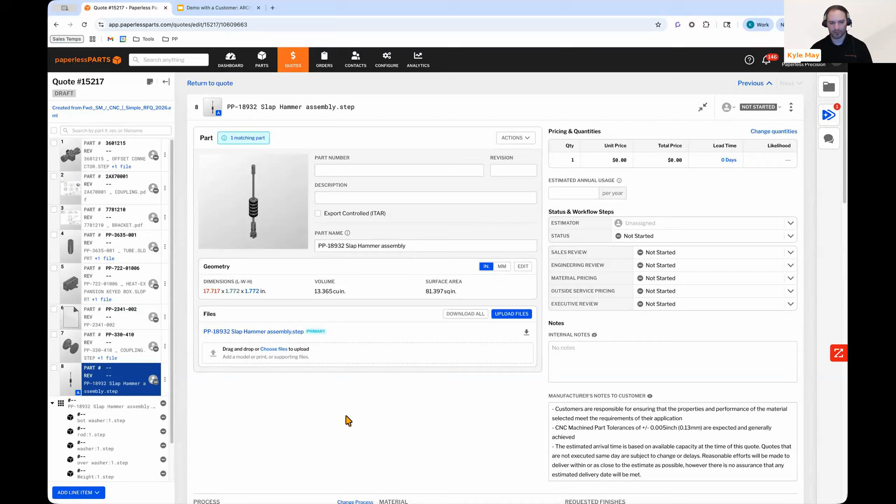You saw me just drag and drop it from our supporting files into creating a line item. Once you scroll down, you'll see that we're actually automatically breaking out the BOM for you. We'll use the structure of the model or the BOM table that lives on a PDF to automatically create that BOM.

I know whenever I was quoting, this saved me a ton of time. This is one of my primary reasons for going with a tool like Paperless. Casey, you guys seeing similar things on your side of the fence?

Oh yes, absolutely. A lot of our instruments that we manufacture are complex, so they probably have 20 to 30 components within that one assembly. So it definitely saves a tremendous amount of time having Paperless Parts versus doing it in our ERP system. Doing it in your ERP system, you're looking at 10, 20, 30 minutes depending on how many components are there. So this definitely is a huge cost savings that we utilize throughout Paperless.

I know it sounds silly saying it out loud, but one of the things I really liked it for was the node quantities, because on some of the more complex instruments, you may be looking at a single component that costs 4 or 500 dollars. Well, if you don't cost out a node quantity of 1 versus 2, you immediately lose 500 dollars on that job. So people are usually really diligent in building that out, so it takes that extra time to make sure their quantities are right.

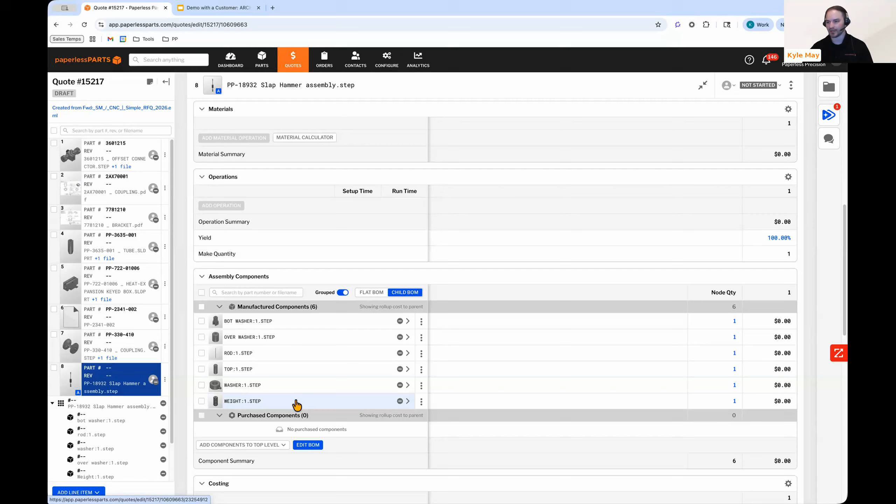One of the part files that I threw at Paperless Parts first off, whenever we were going through our evaluation, was a retractor that had 130 unique components, and I'd spent about a day and a half building out that BOM, and Paperless Parts built it out in about 30, 45 seconds.

We will go into line item 1 here and actually start costing out this part. So a couple of the things that you'll see, once again, we have this purple — we're using AI to scrape the revision and the description off the print. The other thing that we're doing once we get into a specific line item is that we're looking for matching parts.

One of the first thought processes that an estimator typically goes through is they look at it and say, okay, well what have I built that's similar to this in the past? So I can open up this matching parts feature here. We can see we're surfacing exact file matches, but we're going a little bit deeper than that. We're also looking at the geometry across all of the other line items that you've quoted in the past.

There's a lot of gen upping in medical, so whenever you do have that gen up and the geometry is still the exact same thing, but it's got a purple handle on it versus a green handle and it's a drastically different part number, you can very easily go in here and copy and paste that routing and all of those times for the last gen part.

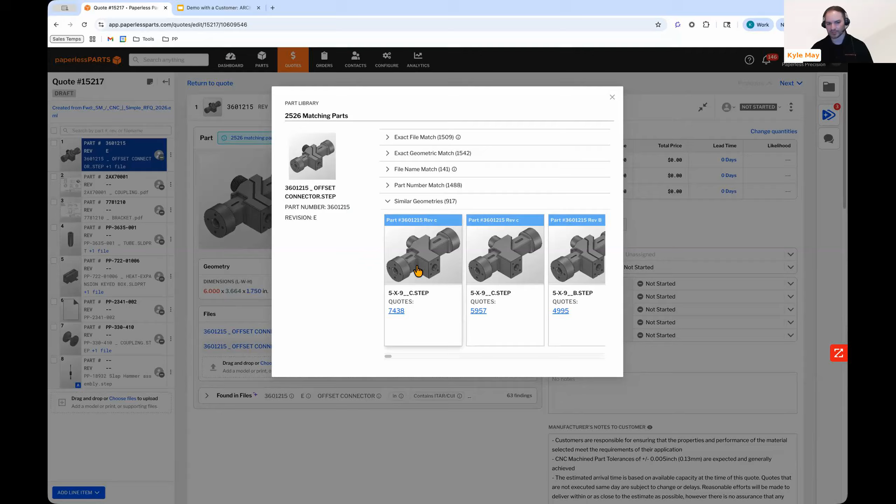And then we're also surfacing similar geometry. So, hey, this part is very close to a predicate part that I quoted a couple months ago. Instead of you having to remember that in your head, having a senior estimator remember that, we're surfacing that to you here, and you can very easily look at the visual differences and say, hey, the one I'm quoting now has a channel built in, this one does not, so I'm going to copy and paste my process and add an additional 5 minutes onto it. So there's a lot of experienced estimators doing this already in their head.

But that's kind of the problem — it's in their head, it's not in a system somewhere. So this is how we systemize that tribal information.

Scrolling down, what we're going to do now is actually put a process to this part, and a process is like a routing template that has some smart features built into it. For my shop, this is pretty generic — this is a milled part.

You can get it as specific as, hey, this is a counter torque versus a reamer versus a drill versus an inserter versus a dilator. You get very, very specific with the types of routing templates that you have built. That way you're closer to the truth from the start.

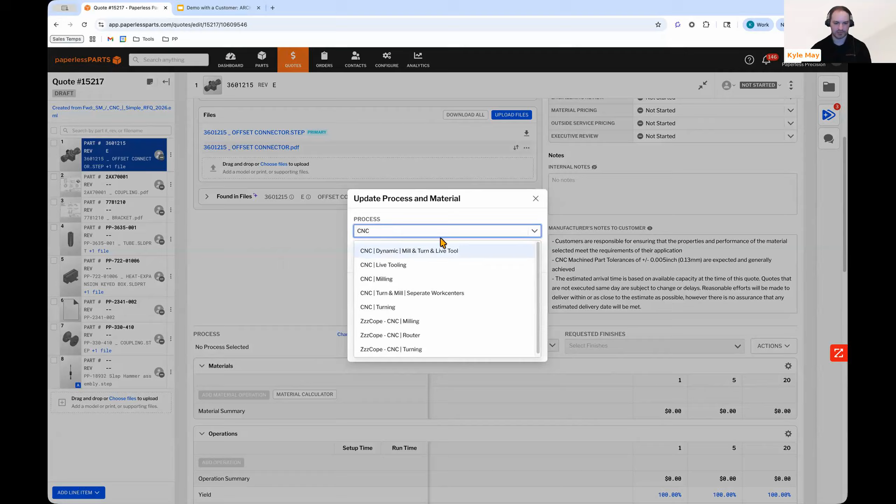So I'm just going to go in — this is going to be CNC milling for me. We are looking at the PDF and surfacing the material, so it's going to suggest it to us here, and then I'm going to update. What this does is it kickstarts our geometric interrogation engine that works in the background.

So I'll open this up now.

So within here, you do have a free CAD viewer in the system. You've got some basic tools.

So if you've got an estimator that maybe has a seat of Fusion 360 just for being able to analyze models, we see shops typically be able to save that little bit of money, or even maybe they have to be able to view CATIA files or MBD files. We can view those within here as well.

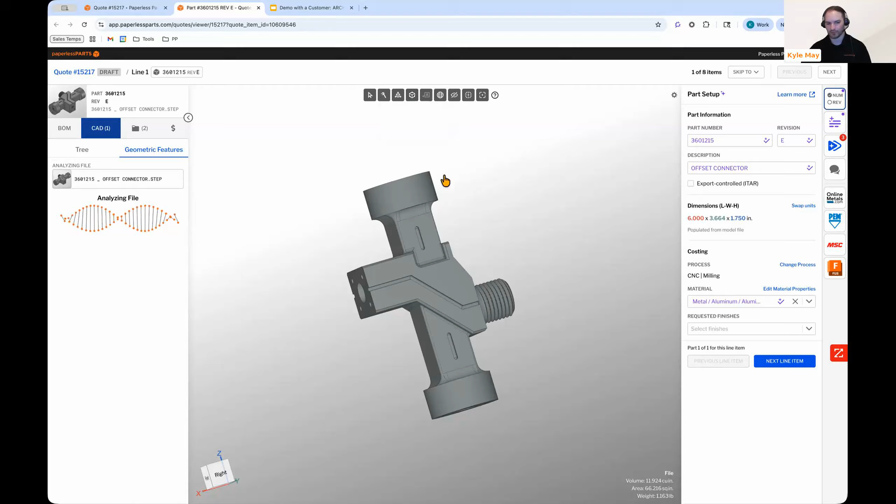But you get some bounding box, measurement tools in here to measure against faces if a dimension doesn't live on a print. We have this selection tool as well.

And so it really encourages the communication between team members. You can very easily go in here and select a face that maybe you have a question about. So I've got that face selected. I can come in here and add that in, and I'm going to tag in my more experienced estimator, Chris, and say, hey, can we do this face?

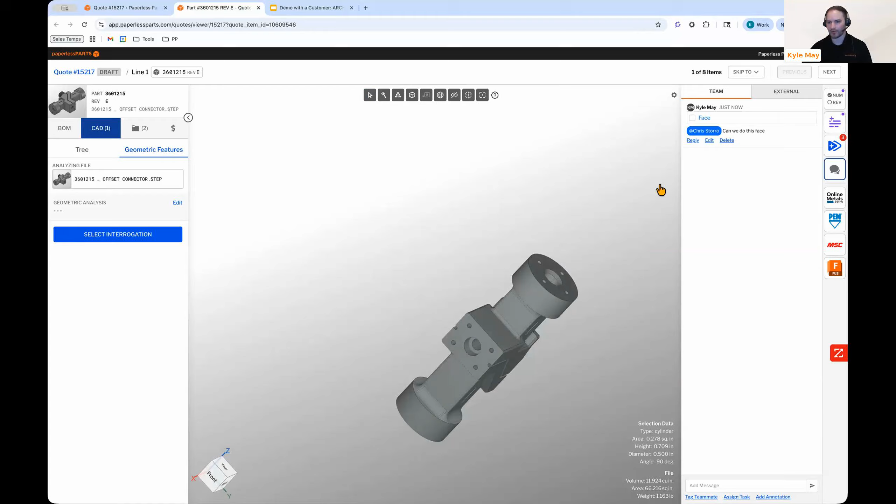So you can send that out, and once you get that sent out, they'll get a notification that, hey, you're wanting to collaborate over a part. And whenever they open that up, it'll rotate it around to the exact zoom and view that you had whenever you made it.

Curious, Casey, I know you guys have an off-site estimator. Are y'all getting a lot of benefit out of this IM service here? Yes, he uses it pretty much every day, especially for some complex geometries that we may see.

So he'll basically tag in any other person that's on site to get with the programmers and discuss different opportunities if it does not work out, as far as if it's not machinable, if it's only plungible, and if we need to make a note for any DFM to the customer regarding unmachinable features.

What about, I think I'd heard, you guys may be using some of the external chat features as well. Yes. So, like any of the DFM features that we may request from our customers if we do win the product, that of course is in the external chat.

Then we can talk with them afterwards once we get the PO in place and basically have all the information at our fingertips and be able to discuss with them no matter what engineer received the product or the project.

Kind of eliminating the error of taking a snippet of the CAD within your CAD software, drawing a bunch of arrows to it and saying, hey, this feature, that face, we need to do X, Y, Z. It kind of puts it all into this system.

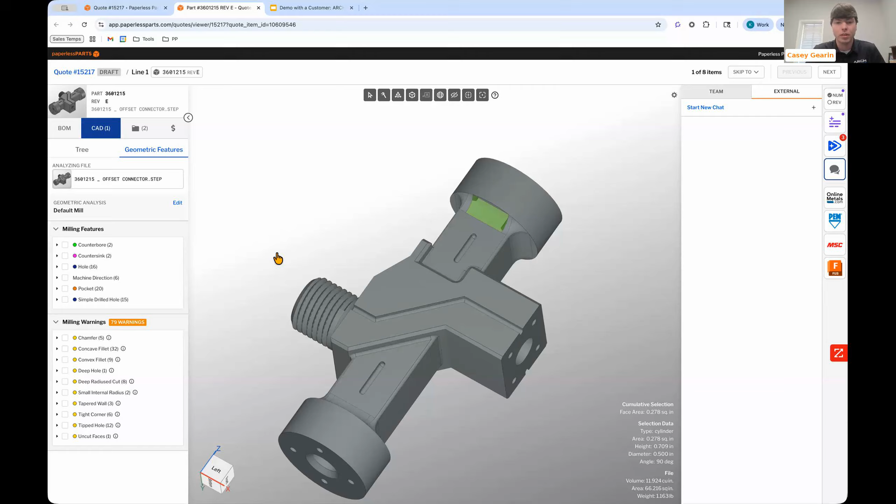Exactly. Definitely had a lot of feedback from customers on how they enjoyed the collaboration with the models, not just 2D prints and snippets. And I jump on a Teams call - it's basically interactive with each other, and they can actually chat within the same platform too. So it definitely helps speed up the process.

And I gotta imagine it also triggers the perception that these guys are investing in software, these guys are investing in the next generation to make themselves better. So it kind of gives a good presentation to your customer, is what I found.

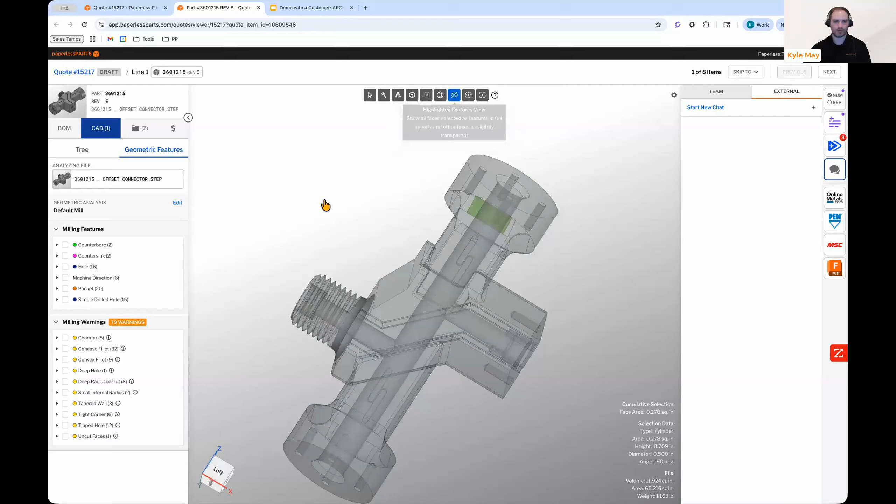But going here, so once we've interrogated the model, we'll call out very specific features for the milling. We've got the counterbore countersinks, the holes that are on this part, and machining directions. I like to think of machining directions as a complexity indicator.

It's all relative to the type of work that you're used to doing. A 6 for my shop may be simple, whereas in other people's shops it may be more complex. So we can set rules that say, hey, anything that is over 6, I need to tag in a more experienced estimator or a programmer to go in and program that part to give us really good cycle time.

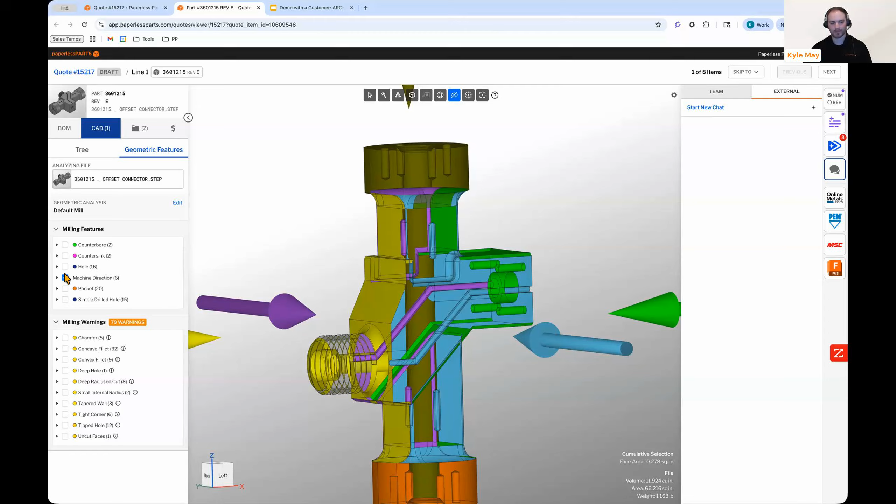The other area of this is the warnings. So I have deep hole warnings clicked on here. For my instance, I don't have high pressure coolant in my mills, so any depth to diameter ratio past 10 on a standard hole, I can't do it in my mill. So I know that I have to add in an additional process.

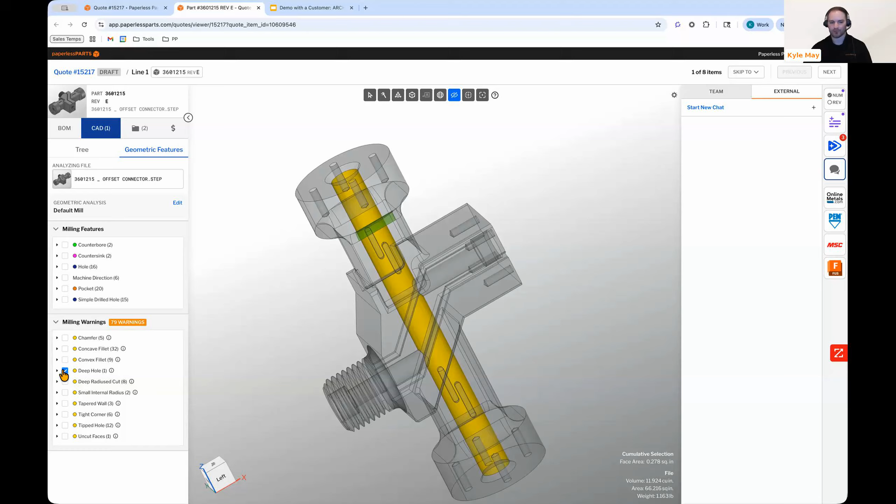And all of these warnings over here on the left-hand side are customizable to your shop so that you make sure you're having relevant flags and not just everything underneath the sun. But we want to make sure that we save time for questions and feedback.

I'm going to go through a couple more steps and then we'll pause there. The next really important part of this, you saw where we were able to surface the high level requirements based off of what your shop typically looks for.

This is where you can go in and start really diving into the print. You can see we've got all of our dimensions highlighted across. We're looking for very specific things across anodize or mil spec, and we're allowing you to build rules so that you can handle those things the same way every time.

One of the ones that I like to call out is surface profile to 3 datums. I know in my shop that I want to CMM check that every time. So maybe I want to bring in my CMM programmer to make sure that we can have a program to inspect that part. We can do that via the rule creation.

So I'll step through that very briefly. You just click on a dimension that you want to create a rule for. I'll go into the exact type of rule that I was just talking about, right?

So I'm going to go into my control frames. I'm going to go profile of a surface. Whenever it has a datum reference count of greater than 2, I want you to bring it up to my attention.

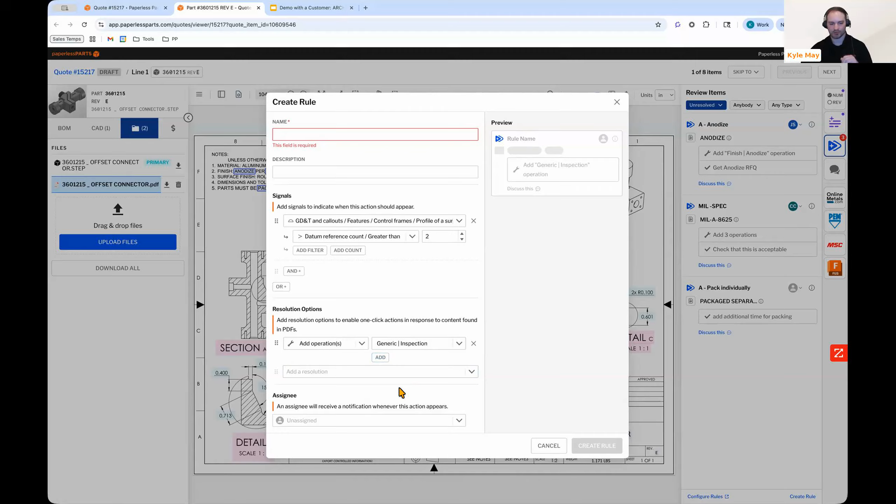And then as my resolution options, I can go in, I can add a specific operation. So that CMM inspection, I'll just go inspect, generic inspection. You can add more. So if you have 3 or 4 operations that need to happen because of something you see on a print, you can add those there.

And then I'm going to automatically assign my outsourcing manager, or I'm sorry, my CMM programmer to check that they can program this part.

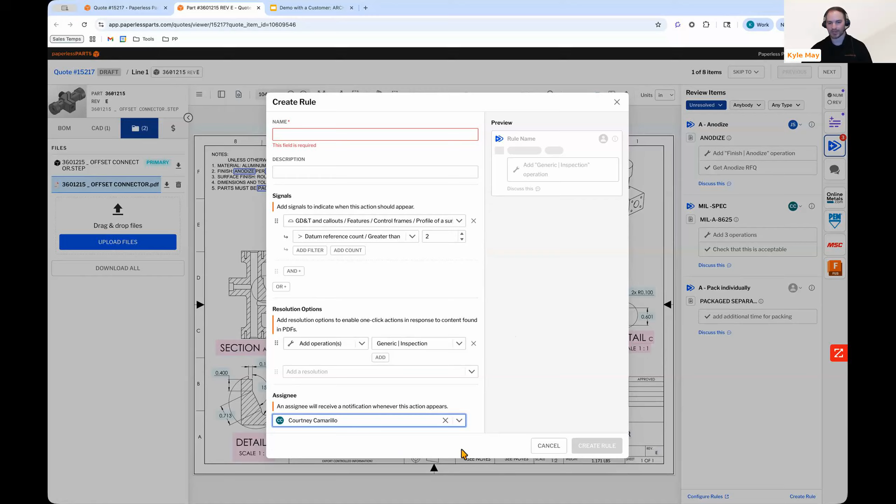And now once I've created that rule, anytime that we see our signal, what we're telling the AI to look for across the print, it's going to trigger the same action. That way you're repeatable and you're consistent.

It doesn't just have to be off of dimensions though. It can also be off of text that lives on a print. So think about your customer matrix that your QMS system probably has somewhere. You probably have to take very specific steps to meet those specifications.

We can build a customer matrix, a spec matrix in the background here to where you can do that as well. So any text, we can also do format searching as well to make sure that you're catching those and it's not biting you in the butt.

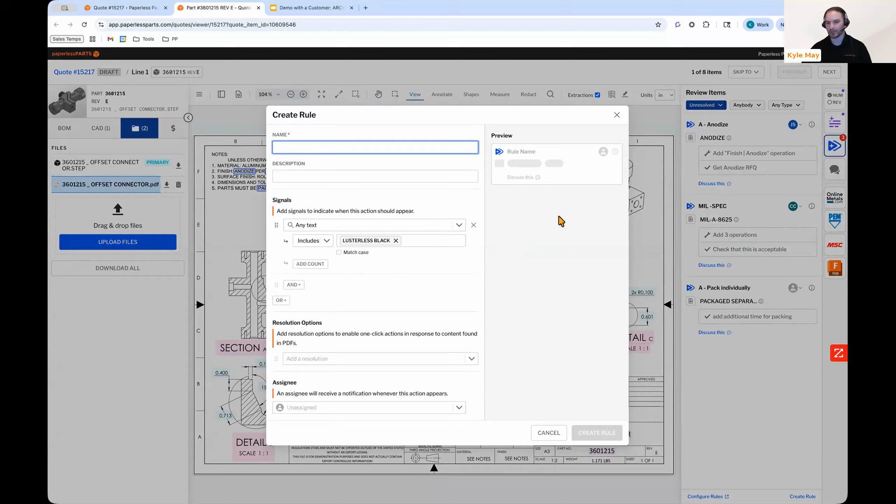One of the examples that I've heard quite frequently is gamma X-ray testing across laser welds. So anytime that it has that spec in there, I know that I have to go to gamma testing. So I want to make sure that I add that operation in.

This is a relatively new feature in Paperless Parts. It's been honed and increased in functionality over the past like 6 months, but definitely something that our medical customers are getting a lot of use out of with all of the custom or customer specifications that they have to deal with.

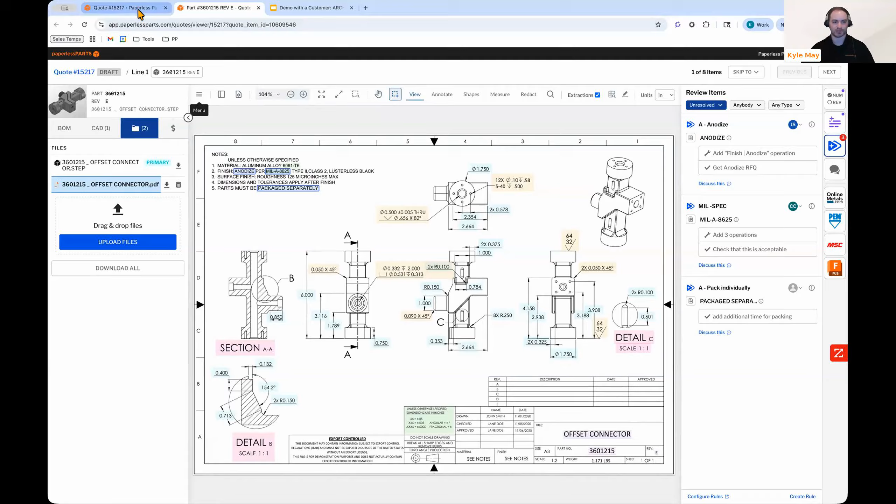Going back over, now we can get into estimating our actual part. So one of the first things here is because we understand the size of the part, we can look at the bounding box and we can help you select material based off of your internal material database.

And then we have our router built out here. So we have our geometry creation steps, and then we have those subsequent steps that need to happen for our shop, like deburr, inspection, shipping prep.

And just know that any of these expansions that you see here, we can very easily go in and make customized solutions. So if you can think of a scenario of if I see this geometry on a part, or if I see this on a print, then I need to do X, we'll build that in for you automatically.

Things like, hey, CNC deburr, we can actually look at the total surface area of the part and say, hey, it's going to take 15 seconds per square inch of the part to deburr this. That's our shop's standard, so it'll automatically go in there and do the math for you.

Scrolling on down, then we get into costing. In Paperless Parts, costing and pricing are two different buckets. Costing is how much it costs me to build this part, no matter who the customer is, no matter what day, or if I'm slow or busy. Pricing is usually strategic or tactical.

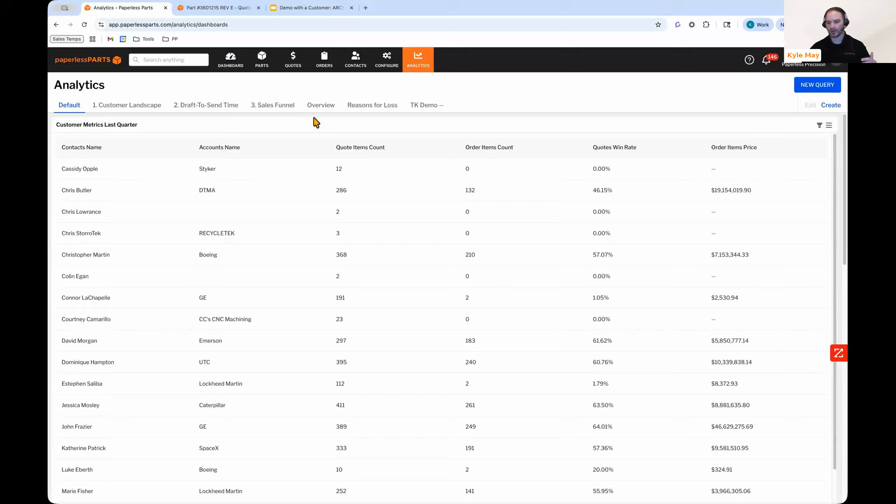So we can track win rate by customer, win rate by operation type. One I like to call out is, if I have to touch it with my wire EDM machine or my sinker EDM machine, I can see my win rate reduces to 10% on an EDM versus if it doesn't have an EDM operation. So either we're not as efficient on the EDM as we should be, or other people are pricing it differently and we need to get more competitive.

You can look and say, okay, if I increase my win rate for parts that go across the EDM machine by 10%, what could that impact on revenue be? Obviously there are other factors that go into it, but a lot of that data isn't being tracked right now for a lot of our prospects that we talk to. A lot of it is because it's manual—somebody has to manually fill out something to track it, versus it being done for you here automatically.

I know more leadership, Casey, on your side uses this at the corporate level. Yes, yeah, all the corporate definitely analyzes this page more than site specific, but any of that data we've built in at the quoting stage, we can query against. So however you want to splice and dice it, it's up to you.